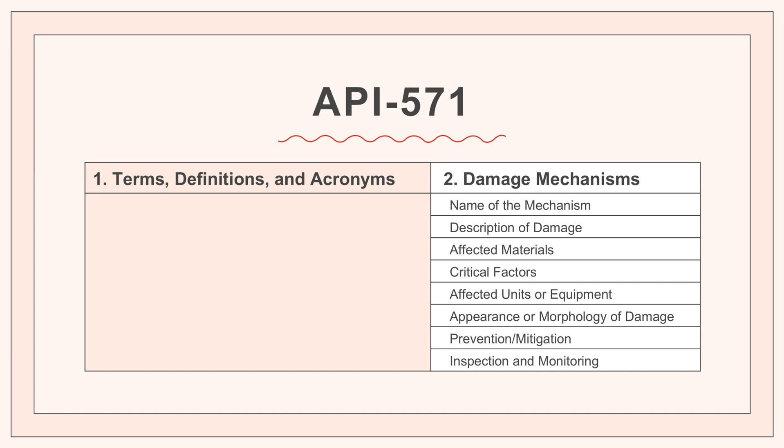Okay, let's unpack this. Starting with what we're calling the silent killers. These are the structural failures that lurk deep inside the metal's matrix. Right. These are mechanisms that change the metal's properties at a molecular level, driven by chemistry, sustained stress, and heat. And they are often completely invisible until it is far, far too late.

The first one is maybe the most insidious. High-temperature hydrogen attack, HTHA. This isn't just simple surface rust. The key insight is that the primary internal damage is caused by the formation of methane gas bubbles at grain boundaries. That's it. That is the whole story right there. You have hydrogen gas that diffuses into carbon steel at high temperatures. Once it's inside, that hydrogen reacts with the carbon that's already in the steel, the very thing giving it strength, and it forms methane gas.

And this is where the structural time bomb starts ticking, because methane molecules are way bigger than the hydrogen ones they replace. Way bigger. And suddenly they're too large to get back out of that dense metal lattice. So they're trapped. Precisely. It's a self-trapping mechanism. This trapped high-pressure methane gas builds up along the grain boundaries, which are the weak points of the metal structure. It's like inflating thousands of tiny balloons inside a solid block of steel.

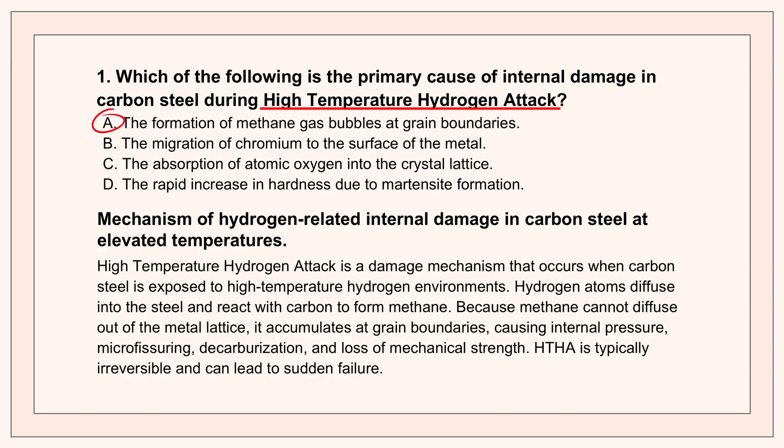That's a great way to put it. That intense internal pressure leads to fissuring, to decarburization, and eventually a dramatic loss of strength. It literally breaks the material from the inside out. It's incredible how a tiny gas molecule can just undo decades of engineering just by getting stuck. That's the danger.

Now, moving from internal chemistry to structural physics, let's talk about creep damage. If someone asked you for a textbook definition, the best way to describe creep is as a time-dependent deformation occurring under sustained stress at high temperatures. Time-dependent. So how is this different from, say, a sudden fracture, like from an overpressure event? Well, a sudden fracture is immediate. It's catastrophic. It's the material's yield strength being exceeded in a moment.

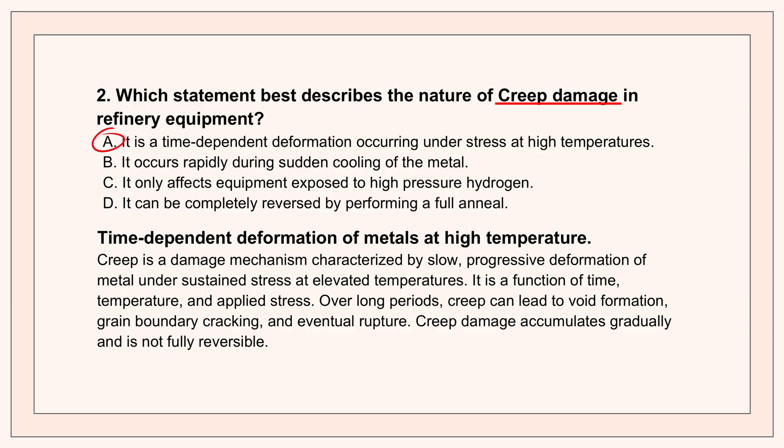Creep is the ultimate slow-motion failure. Imagine taking a piece of stiff, old chewing gum and hanging a tiny weight on it. It won't break right away. Right, it'll just sit there. But over weeks, that gum will gradually, slowly stretch and deform under that constant load. That's creep. It's progressive damage that just accumulates over time.

Yes. And it happens when metals are stressed at temperatures typically above, say, 40% of their absolute melting point. Over years, this movement leads to the slow formation of microscopic voids and then eventual rupture. You can't fix it. That's the critical part. Our sources emphasize this. Once creep damage has progressed, you can't reverse it. No standard heat treatment will heal it. The clock has simply run out.

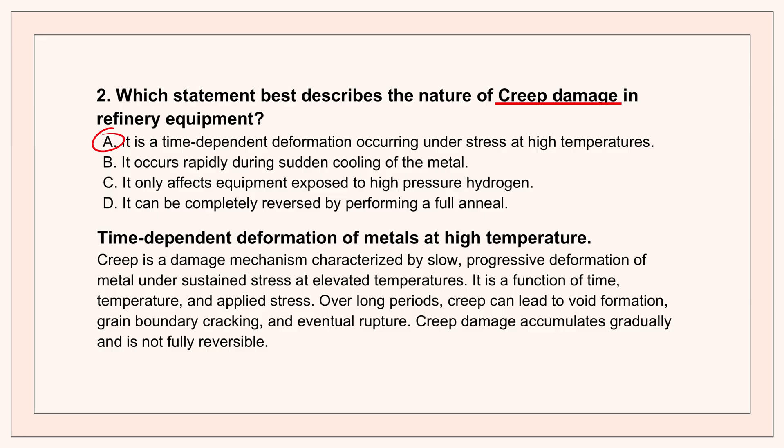Speaking of material aging from heat, let's talk about spheroidization. It's another temperature-driven change in the microstructure. And it's often paired with creep risk, you're right. So what's happening here is that when you expose carbon steel to prolonged high-temperature service, its internal structure starts to change.

How so? Specifically, the strong plate-like structures, we call them lamellar carbides, they begin to transform into softer, more rounded carbide particles. So the structure is losing its sharp load-bearing architecture. Exactly. Think of the lamellar structure like strong sheets reinforcing the metal. Spheroidization is like dissolving those sheets and letting them clump into little softballs.

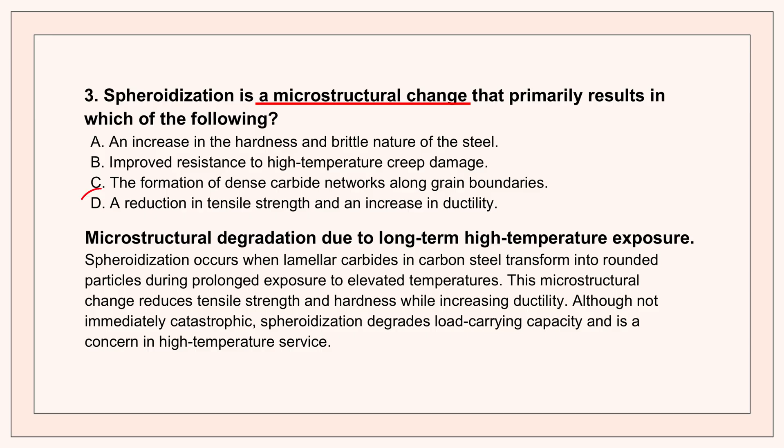So what's the result? The immediate result is a reduction in tensile strength and an increase in ductility. Now, increased ductility might sound good, but in this context, it's a bad sign. It means the steel is getting weaker, softer. It's degrading its core capability. It's basically aging out of service, even if the surface looks perfectly fine.

Okay, so now let's combine stress and chemistry. Our final structural mechanism is amine stress corrosion cracking, or amine SCC. Right. This is failure driven by residual tensile stresses, especially in weld areas when they're exposed to amine solutions. This one is a huge problem, but the prevention method is absolutely critical. The most effective method is performing post-weld heat treatment, or PWHT, on all weldments.

Which brings up the key question. Why is that the best answer? Why not just say reduce the amine concentration or something? It's all about the stress, isn't it? It's all about stress relief. When you weld metal, you introduce massive localized heat. As it cools, it shrinks unevenly. This locks in residual tensile stresses. Internal forces that are just constantly pulling the metal apart.

Exactly. Think of it like squeezing a giant spring and then locking it in that compressed state. PWHT is a controlled heating and slow cooling cycle that lets the metal lattice just relax. It's like slowly warming that spring up until the locked-in stresses just melt away. Precisely. And by removing that critical stress component, you eliminate the main driving force for the crack to even start, even if the corrosive amine is still there.

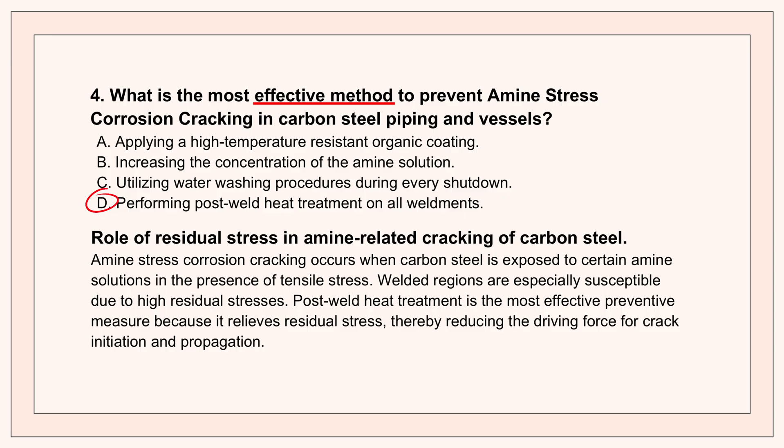We talked about eliminating internal stress with PWHT. But what if stress isn't the main problem? Here's where it gets really interesting. Yes. Moving from internal integrity to how flow and specific chemicals can literally chew away at the surface. Let's start with sulfidation corrosion. This is common in refinery units that process sulfur-containing fluids at high heat.

Right. And in carbon steel systems, the corrosion rate isn't dependent on chromium, which is what you might expect. No, it's a real dark horse element here. For carbon steel, sulfidation rates are strongly affected by the content of silicon. Silicon. Why silicon? You almost never hear about it being more important than chromium for high-temperature corrosion.

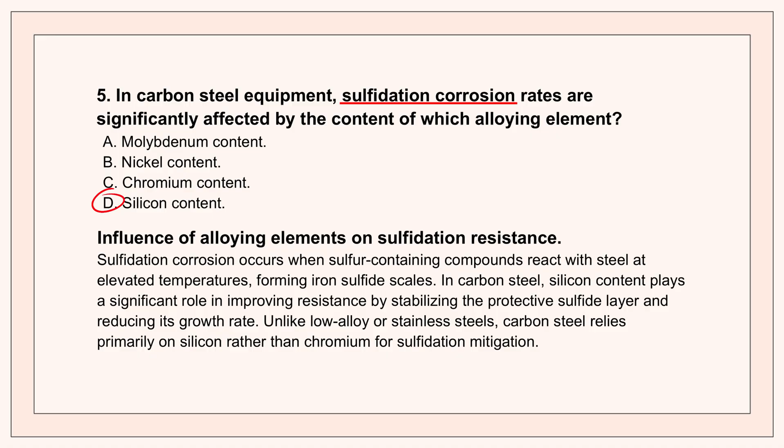That's because in your standard carbon steel, there just isn't enough chromium to form a truly protective layer. So silicon steps in. It helps form a more compact and protective iron sulfide scale. So the scale itself is the shield. It's the shield, and silicon makes it a better shield, reducing the rate of metal loss. In these low alloy environments, silicon content is the number one thing to look at.

Now, for a different kind of acid, naphthenic acid corrosion, or NAC. This is driven by organic acids in crude oil. For an inspector in the field, what's the telltale visual sign? Okay, so NAC happens when you're processing high-acid crude oils at high temperatures, and the damage is very distinct. It is most commonly identified by sharp-edged pits or streamlined grooves in high-velocity areas.

The streamlined grooves, that's the key, right? Absolutely. That appearance, the sharp pits and the grooves, it confirms that fluid velocity and turbulence are central to the attack. So the acid attacks and the flow sweeps away any protection. Exactly. It sweeps away any weak protective layers that try to form. So NAC is always worst in areas of high turbulence: elbows, pump impellers, downstream of fittings.

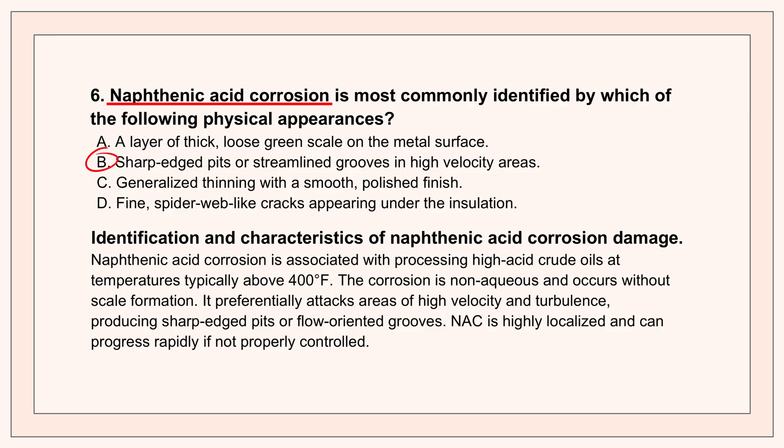That concept leads perfectly into our next one, erosion corrosion, which is really the definition of a one-two punch. Mechanical wear combining disastrously with chemistry. So where in a system are we most likely to find this? You'll find it where the fluid path changes dramatically.

So pipe bends, elbows, and areas downstream of control valves. And why those specific spots? It's because the high velocity and the flow disturbances physically disrupt and remove the thin, passive surface films the metal relies on for protection. They're scraping off the armor. You are. And once that film is physically scraped away, the naked metal underneath is immediately exposed to the corrosive fluid. The chemical reaction just accelerates dramatically.

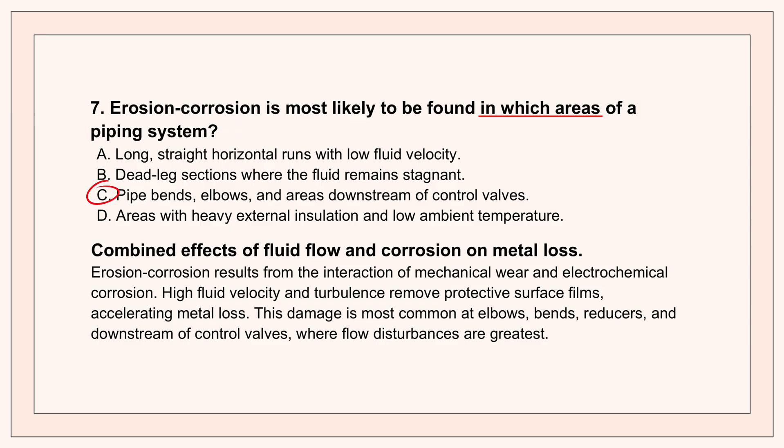It's a vicious cycle. Okay, this next one has a truly terrifying timing factor. Polythionic acid stress corrosion cracking, PSCC. Ah, yes. When does this cracking typically happen? You'd think it would be when the unit is running hot and hard, but no. It typically occurs during unit shutdowns when equipment is open to air. And if we connect this to the bigger picture, that timing is absolutely crucial for safety and maintenance planning.

So what's happening? This failure affects what we call sensitized austenitic stainless steels. Basically steel that's been damaged by high heat exposure, which depletes the chromium at the grain boundaries. So the material is already vulnerable, but why does the failure wait until the unit stops? Sulfur compounds build up on the surface during operation, but it's only when that sulfur-containing scale reacts with oxygen and moisture from the air during the shutdown that these highly corrosive polythionic acids are formed.

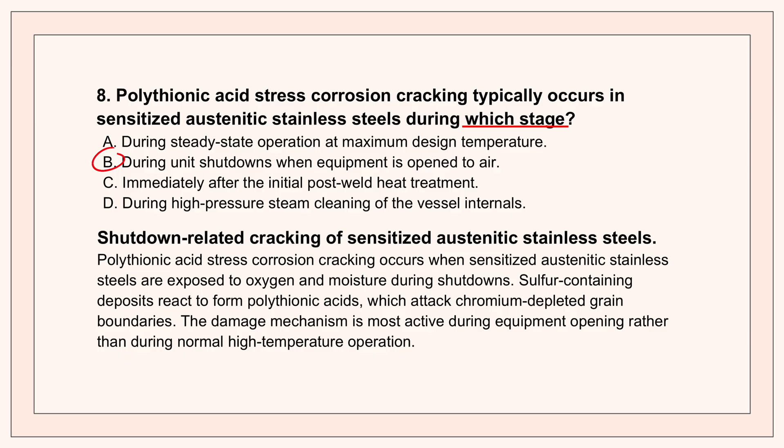So the acid isn't even there during operation. It's created during the cool down process. Precisely. And that acid then aggressively attacks those chromium-depleted grain boundaries. It's why inspection crews have to be so aware of PSCC risk when they open up these systems.

All right, let's shift our focus completely now. Let's talk about external factors, things happening on the outside of the pipe. And these are often hidden from sight, which makes them extremely dangerous. Let's start with the classic one, corrosion under insulation, or CUI. Notoriously difficult to detect. We know you need moisture, but temperature is the accelerator. What's the most aggressive temperature range for CUI? It's between 10 and 350 degrees Fahrenheit. That's a huge range. It is. So why is that specific range the corrosion Goldilocks zone?

Well, below freezing, corrosion pretty much stops. Not enough liquid water. At very high temperatures, say above 350 Fahrenheit, any water that gets in just flashes off as steam. So the water can't stick around. Right. But that 10 to 350 range is the sweet spot. It allows liquid water from rain, leaks, condensation to stay present for long periods of time while still providing enough thermal energy to constantly accelerate the corrosion. And it's hidden under the insulation. Hidden the whole time. It often goes undetected until you have catastrophic wall thinning.

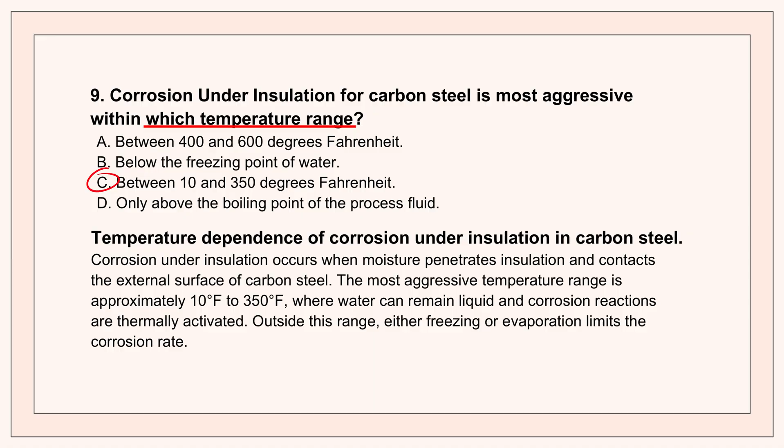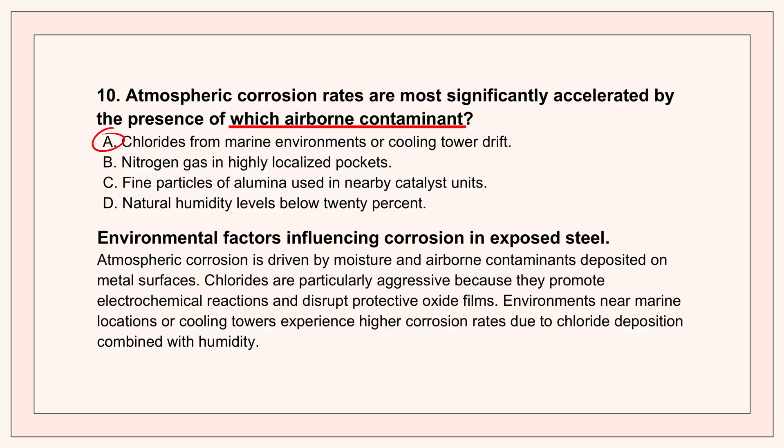Okay, finally, let's touch on general atmospheric corrosion. We know moisture and temperature matter, but what's the one airborne contaminant that just supercharges the corrosion rate? While pollution is a factor, our sources confirm that the presence of chlorides from marine environments or cooling tower drift is the number one accelerant. And the mechanism there is all about breaking down that protective film, isn't it? It is. Steel naturally forms a thin, protective oxide film. Chlorides are incredibly efficient at promoting electrochemical reactions that just break that film down and prevent it from reforming. It's why things rust so fast near the ocean. Or right next to a cooling tower, which is constantly spraying chloride-rich water vapor into the air. Yeah. Those are incredibly aggressive environments.

Wow. So what does this all mean? Well, we spent a good bit of time on two specific types of high-temperature material aging, right? Creep and spheroidization. Right. And both of them gradually and irreversibly reduce the mechanical strength of the material over time. Crucially, this degradation of the internal microstructure can go on for decades without any obvious signs on the surface. The invisible metallurgical clock ticking away.

Exactly. So given that, a really critical question arises for every asset owner. How should engineers balance the initial cost savings you get from using, say, a lower grade material versus the vastly increased inspection costs that you'll need to monitor that invisible degradation over the full life cycle of the equipment? More frequent, more complex, more invasive scans. It's a massive financial and safety calculation. And it's a calculation that knowledge of these mechanisms forces you to confront.